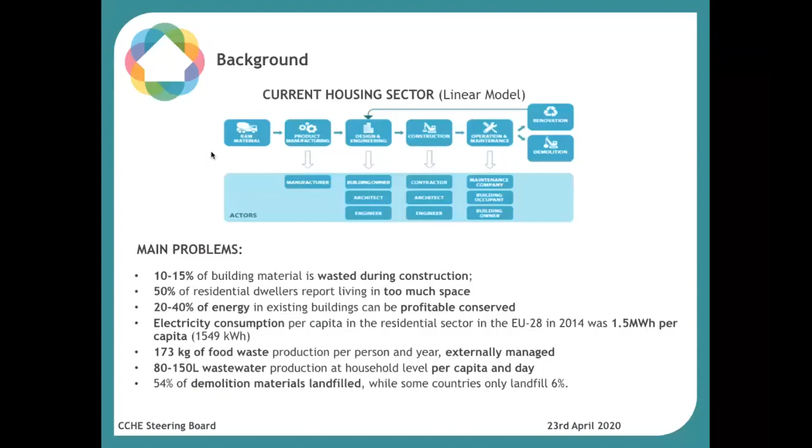generates problems: from 10 to 15% of building materials is wasted during construction. Around 50% of residential dwellers report living in too much space. From 20 to 40% of energy in existing buildings can be profitably conserved. There is a large amount of energy consumption per capita in the residential sector in Europe, around 173 kilograms of food waste production per person per year which is externally managed, from 80 to 150 liters of wastewater production at household level per capita per day, and around 54% of demolition materials go to landfill, while some countries only landfill 6%.

So the main goal and scope of the HOUSEFUL Project is that the project develops an integrated system of services composed of different solutions co-created by stakeholders in the current housing value chain. The HOUSEFUL service will aim at the circular management and efficient use of water, waste, energy, and material, which are the vectors in which we develop the selected solutions. Finally, those solutions will be integrated into a software as a service, enabling the replication of proposed circular solutions offered to stakeholders as a circular economy business opportunity.

So to demonstrate that those solutions developed in the HOUSEFUL project can be profitable and work in a real scenario, we evaluate and integrate those solutions in 4 demo buildings. Those are the front runner buildings: 2 of them, Demo 1 and Demo 2 in Spain, and Demo 3 and Demo 4 in Austria. All of this is with external advice and collaboration with the CCHE board.

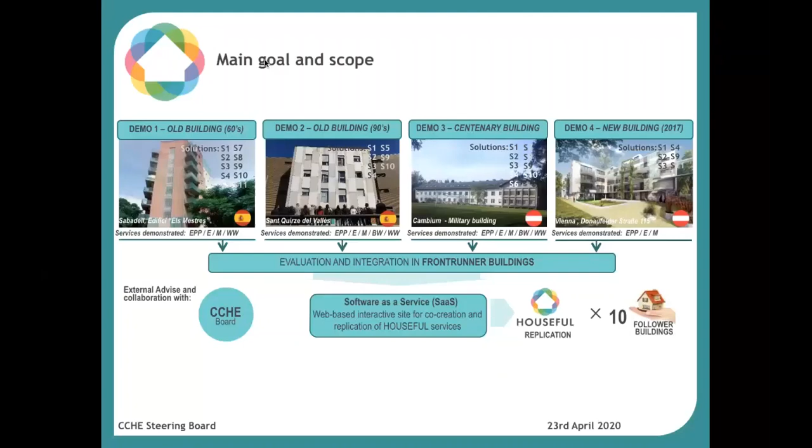So within this project, we have 5 main challenges. The first one is to redesign the new business model in order to break the linear procedures into a circular economy that helps us reduce all these impacts that we've seen.

The second challenge is the need for a robust, standardized, reliable, and day-to-day market usage methodology to quantify the degree of circularity. This is the key point we are going to see here in this webinar.

Challenge 3 is to guarantee the environmental, economic, and social feasibility of the circular existing and innovative solutions in order to co-create the service by applying the life cycle thinking approach.

Challenge 4 is overcoming the cultural and social barriers, also very important, for the effective co-creation and acceptance of the new circular economy business opportunities.

And finally, challenge 5 is providing policy recommendations, guidelines, and tools able to enable the current framework conditions in the housing sector.

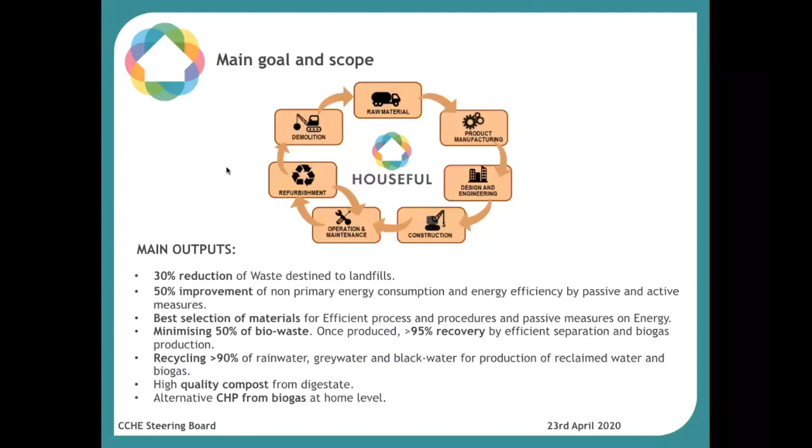Recycling more than 90% of rainwater, grey water, and black water for production of reclaimed water and biogas. High quality compost from digestate, and an alternative CHP from biogas at home level.

And that's all. It's a quick introduction to the project, but you can also send me an email or ask me for more information if you are interested about it.

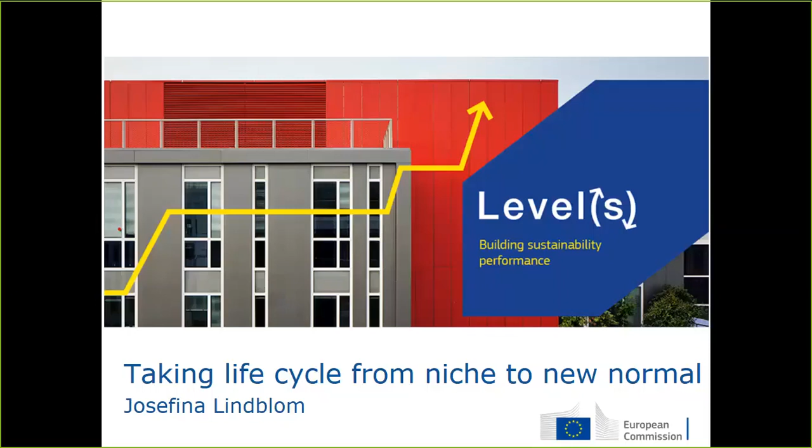So what areas are we covering with Level(s)? First of all, we are covering 3 areas which are all linked to resource use and hence environmental impact: whole life carbon, so energy, water, and materials. And there we have waste included as well, of course.

We also have 3 areas more linked to the quality and value of the building: health and comfort, resilience to climate change, and life cycle costing. So in those 6 areas, we have indicators.

So as I said, we have indicators in carbon, material, water. Then we have health and comfort, where we look at indoor air quality and thermal comfort range. And then we have cost and value. Macro objective 5 is resilience to climate change, where we look at time out of thermal comfort range, just as under macro objective 4, but here instead of today we do it for future climate scenarios, 2030 and 2050. The last one is on life cycle costing and value creation of the building.

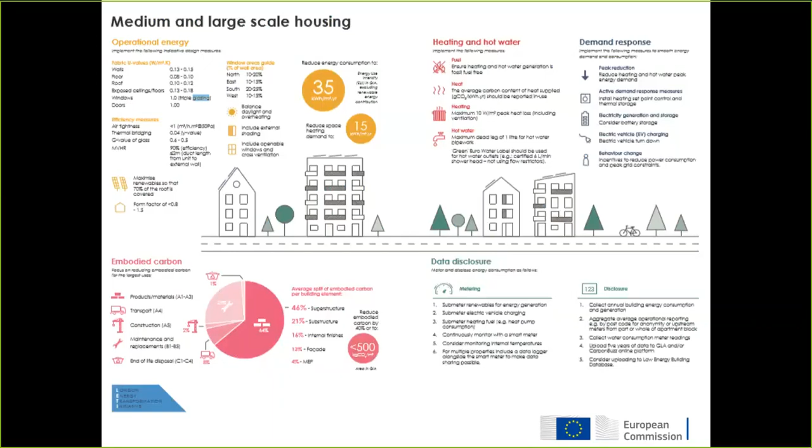So Level(s), what is it going to be used for? We see it as it can link circular economy and a carbon neutral Europe through lots of different kinds of initiatives at the EU level, whether it's sustainable finance work or green public procurement or anything else. We want to support member states to integrate life cycle thinking into building codes and their own procurement. We believe that if we use the same kind of methodology, the same language, even if we use different initiatives, then we can improve comparable life cycle data, enabling learning and benchmarking.

We want, as I said in the beginning, to support normal building projects to consider life cycle in a slightly easier way than what is available to the market. And also then certification schemes assuring their work reflects European policy by aligning themselves with Level(s). And we see how many of them are doing this already.

Also for investors, I wanted to finish off with what we have understood in the development of Level(s), because investors have been part of that development as well. They see many of the indicators as really useful for them, whether it is on health and comfort, buildings being adaptable, flexible, looking at the service life, the obvious ones with energy and water consumption, but also life cycle costing, and interestingly enough, the embodied carbon piece, the indicator that I focused on here during my 10 minutes, for future legislation.

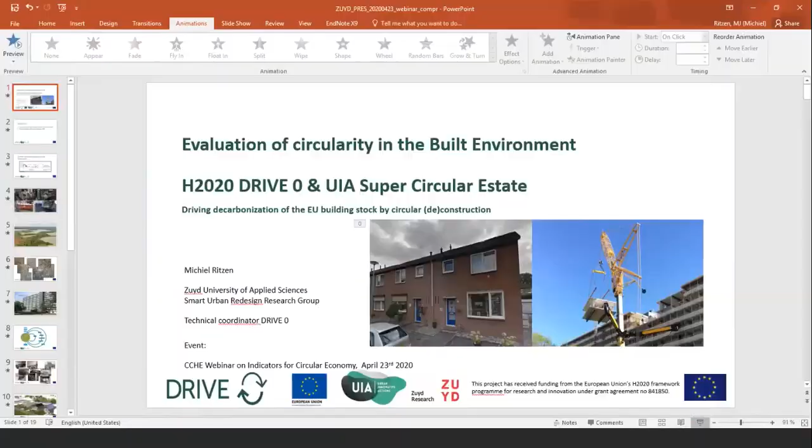Yes, thank you, and welcome everyone to my presentation. I hope you see it. Yes, correct, that's good. So why do we need it, and what are we doing in our research group actually in this field? That's what I'm going to present in the next 10 minutes. It's a full presentation, 19 slides, so I will go very briefly over them. In two of our research projects, we're addressing this issue, evaluation of circularity in the built environment. The projects are Drive Zero and the Super Circular Estate.

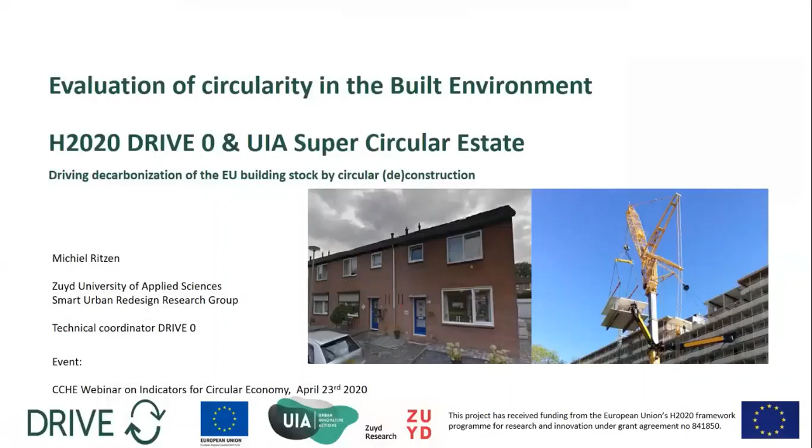Just briefly the background, and I think the previous speaker already explained very nicely the challenges we have in the built environment, the huge environmental impacts, and that's of course why we are focusing on decarbonization of the built environment.

But this built environment decarbonization is mainly looked at from an operational energy perspective. That is only part of the story.

And of course, now we have the other ambition within the Netherlands and the European Union to work towards a circular economy. By 2050, at least in the Netherlands, we want to be completely, fully circular. And by 2030, we already want to be circular by 50%.

That has huge implications for the built environment, because the current demolition practice in the Netherlands, and these numbers are comparable worldwide, is that we hardly reuse or recycle any material. We say that we recycle about 95%, but most of this is being downcycled, and only 3% of demolition materials go back into building construction.

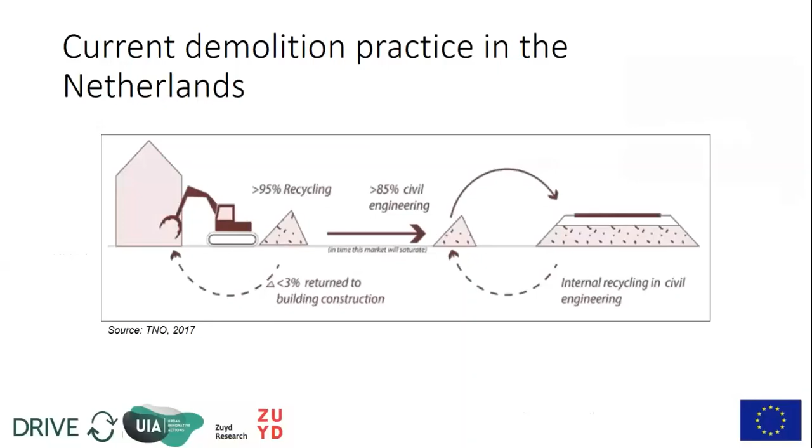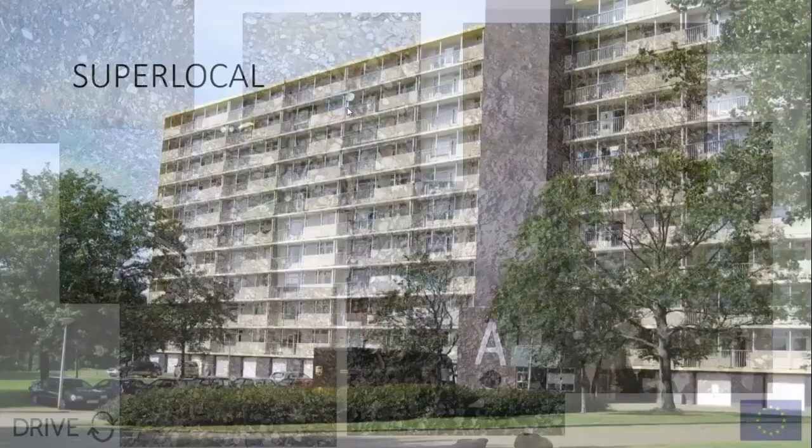So in our first project that I want to present, it's called the Superlocal project. We had 4 of these high-rise buildings, and they were obsolete, they needed to be demolished. We said, let's not demolish them traditionally, but let's apply this 9R model and think from a material perspective.

So what we did is we made a full inventory of all these apartment buildings. We have more than 10,000 QR codes. We labeled everything. We know exactly what was in these apartment buildings.

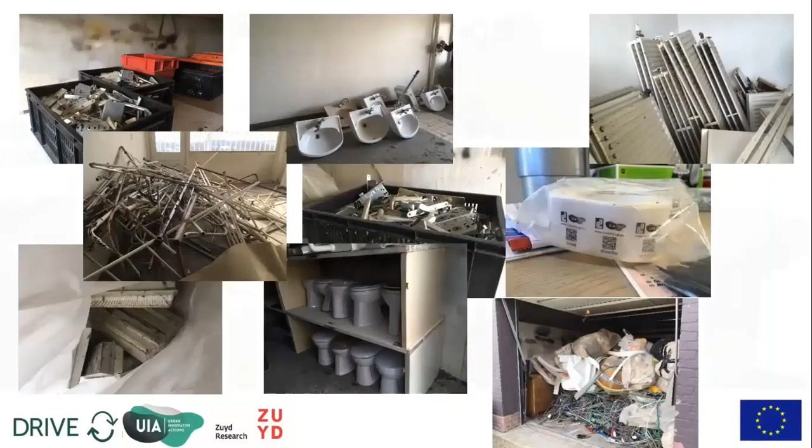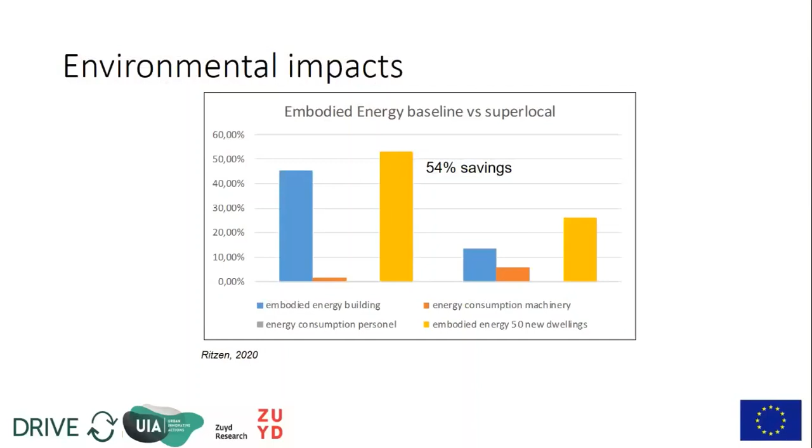We started making the first calculations, and we said, okay, if you're only looking at embodied energy on the demolition potential from this apartment building, we can have a 54% saving.

So that is what we challenged ourselves on in the Drive Zero project. How can we realize renovation solutions based on this thought of reusing materials from demolition.

We said focus on reusing and recycling. I hope the microphone is better now.

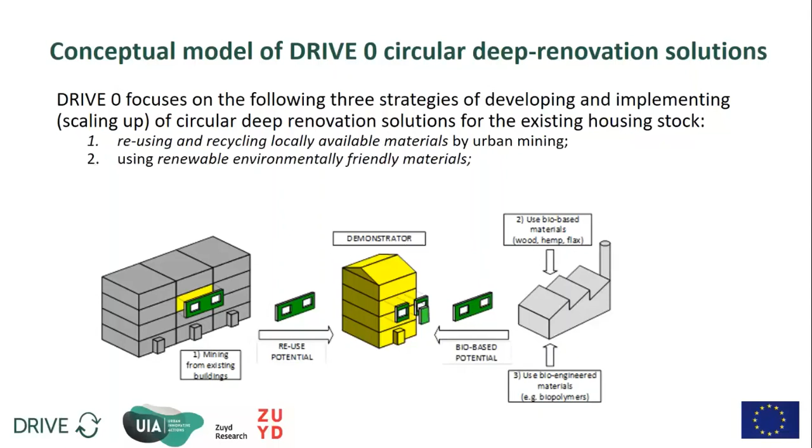Now, we said we're going to reuse and recycle locally available materials by urban mining - it's the most important step. Then we're going to use renewable, environmentally friendly materials and bio-based engineered materials, so that the life cycle energy is lower compared to traditional retrofit solutions.

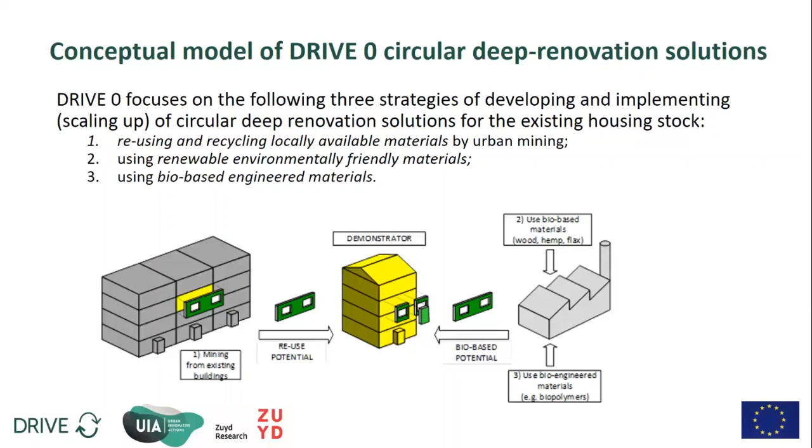And what is then a circular deep retrofit or circular deep renovation? The first thing is you have to have a full understanding of the definition. We said you cannot speak about a circular solution if it's still based on fossil fuels, so it has to be based on 100% life cycle renewable energy.

Meaning you provide enough renewable energy for the operational energy as well as for the embodied energy. Moreover, all your materials should be part of infinite technical or biological cycles.

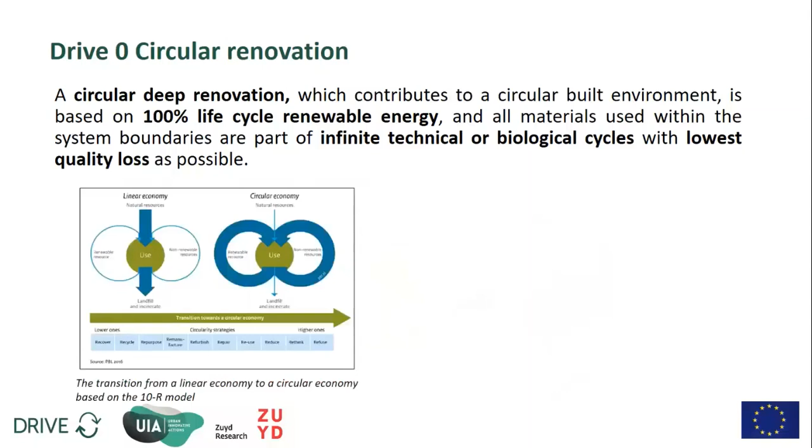And how are you going to address that, in the 7 demonstrators that we have in the project, and how are you going to calculate it? That's what we did last month - we finalized our first report, focusing on these environmental impact indicators that were very clearly mentioned by the previous speakers, embodied carbon indicators.

But we now need to make the next step to combine environmental indicators with criteria. What we did is 4 main criteria.

We're losing Michiel, I think - again. Hello? I'm back? Yes, just the audio sometimes is not so clear, but now it seems to be better.

So we combined the environmental impact indicators, as mentioned by the previous speakers, with design for disassembly criteria.

What I wanted to mention in this report is that the embodied energy ranges between 1.5 and 7.6 gigajoules per square meter of the benchmark. In the next step of this project we have to combine this with the operational energy and work towards a complete lowering of the life cycle energy.

Then we combined those numbers with the building circularity indicator that already exists, developed by the MacArthur Foundation and ALBA Concepts, and we investigated the differences. If you look at it from a mass perspective, that's mainly being addressed at the moment in a number of projects, but mass only is part of the whole story. We should be calculating embodied energy, operational energy, and embodied and life cycle carbon or CO2 levels as well.

What we see in the projects is that there is a recoverable material potential between 20 and 85%. That means that if we rethink our projects correctly, we can achieve a significant lowering of embodied energy.

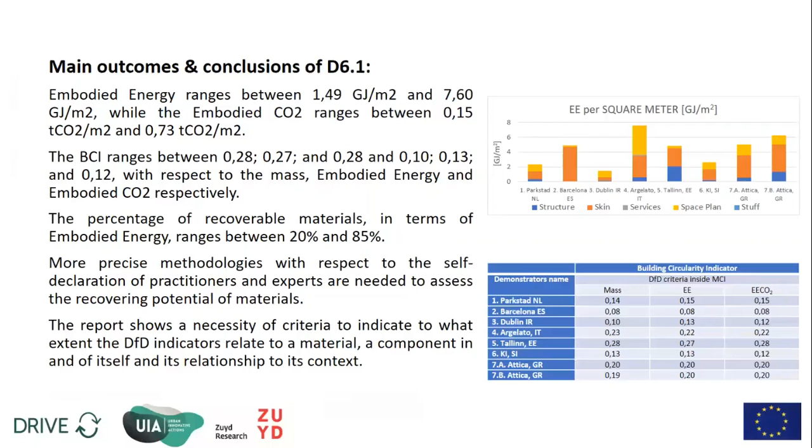Looking forward, we're now in the phase of the next task in our project. We are collecting a number of monitoring technologies on circularity, and here your input is welcome. If you have technologies, we are really looking forward to hearing about them.

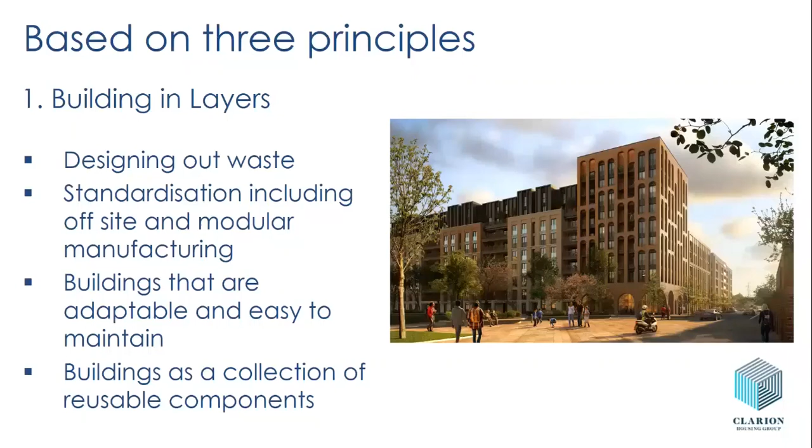So how do we design them to allow that to happen cleanly and quickly and without too much impact on the structure? This last one is a conversation we're having with quite a lot of our design teams at the moment, wanting them to think about buildings as a series of components rather than a single structure on its own. So how do we design it in such a way that it could be taken apart later, those materials reused, perhaps in other structures or in completely different ways? So just before they start to design anything, how do we anticipate the end of life for the building itself?

The second principle is around social value. Again, this is a sort of stretching of what maybe most people think of as circular economy, to think about how we engage with the communities we work with and other stakeholders. How do we promote a sharing economy, and look at influencing behavior around recycling and waste within the home itself? So it's a very important part of our whole approach.

And then this third one, perhaps is more expected, is around waste and the waste hierarchy. Demolition for maximum recovery value. Now, if you remember that image we saw a little earlier of those homes that are now on site and being built out, this is what they are replacing. This is next door to that site. So with this tower block, what we do is a pre-demolition audit - what are the materials in here that can be reused, recycled or upcycled or used in the new buildings - and then we allow for additional time in the demolition program for the whole building to be soft stripped and reused then as much as possible as we go through the whole process.

Then we really look at, obviously, supply chain integration. These are large schemes over a number of years, so there's potential to do a great deal of work around supply chain integration to maximize on our circular economy outputs. And then the last point here is deconstruction plans. So now when I get a pitch from an architect to design a building for me, I'm also asking them: how are we going to take that building apart?

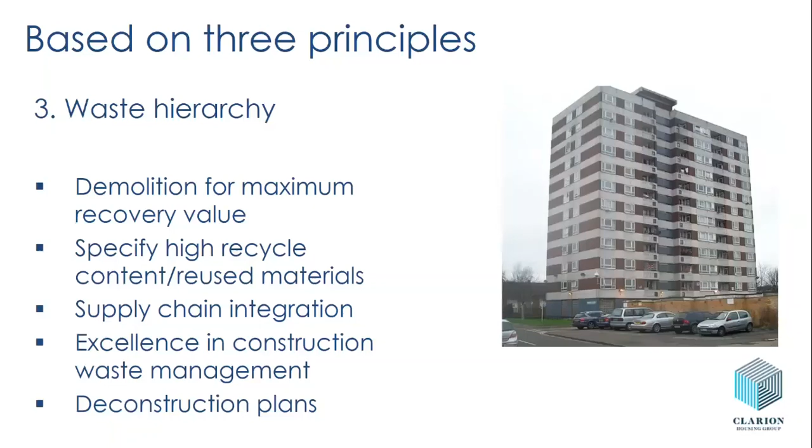Show me how you've designed it in such a way that that building can come down in 50, 60, 80, 90 years from now. So in terms of practical delivery, these are the processes that we're thinking about.

End of life for existing buildings, like that tower block we just looked at. Looking at what products and components we're going to be using. How can they be reused? How can they be upcycled? Where do we get social economy benefits through the construction process itself?

Then the most important bit, and the bit that gets overlooked, really, is the use stage. These buildings in these neighbourhoods are going to be places to live, places that need to be maintained and adapted and upgraded for decades to come. So what are the decisions we make early on that allow us to deliver and maintain and run these places with circular economy principles to the fore?

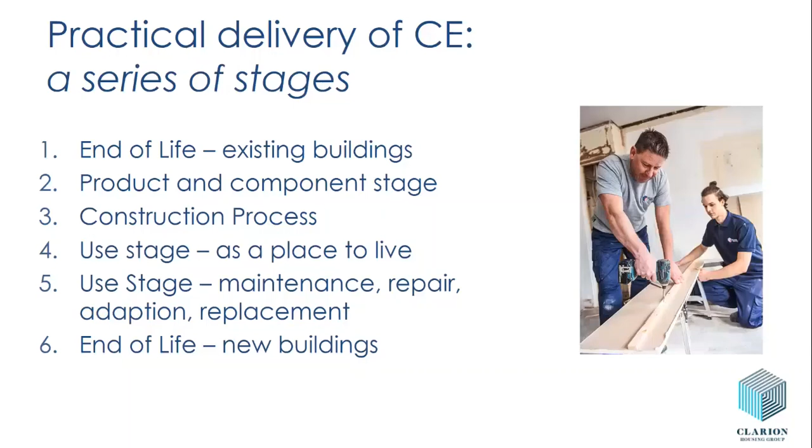And then we come full circle again to end of life for these buildings. Are they refurbished? Are they replaced? How do we design in such a way to accommodate that?

As touched on earlier, we're a very large organization, so we have particular strengths. We're buying a lot, we're commissioning a lot, we're replacing many components through the lifetime of these buildings. So in all our major procurements now, we ask questions about circular economy. They're scored, they're part of what determines who wins this work and who doesn't. Effectively, we're trying to shape the market to think beyond traditional responses to sustainability, to be thinking much more along the lines of circularity. So we're using our spending power to allow us to do that.

One of the important things we try to emphasize here is this is much more than just about sustainability. I think we're all used to seeing sustainability strategies as part of regeneration programs, housing, built environment. This involves a different kind of thinking. We're right at the start of that. We're using our procurement strength to help drive that process along.

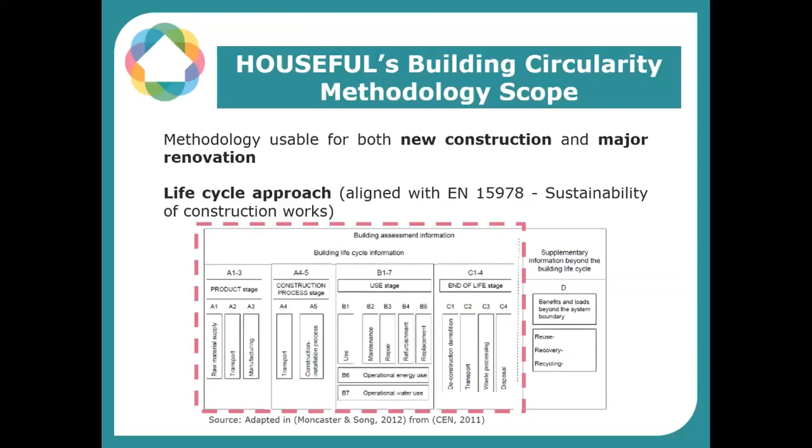So how are we approaching this measurement of circular economy? First of all, we propose to measure the energy consumption and the rate of, let's say, 'circular energy'—and I put that in quotes because circular energy is not something clearly defined—but we aim to measure how much of the overall embodied energy within a building's life cycle comes from renewable sources. Not only renewable sources: for example, if we are refurbishing a building and increasing the insulation of the building's skin, then we have reduced energy consumption. So energy savings shall also be accounted as circular energy from our perspective.

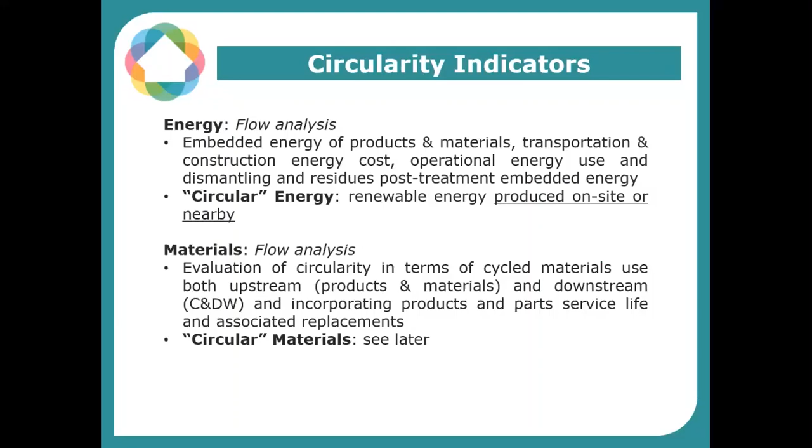Also, we are performing a similar analysis from a water perspective, evaluating the rate of water that comes from cycled sources. Water is a circular resource by its nature, but what we understand as circular water here is the water that comes from cycled sources recovered, for example grey water or black water, rainwater, and so on.

These are three approaches more or less similar for these three pillars to the suggested approach from the Ellen MacArthur Foundation, which is a flow analysis perspective. And now we are moving to other aspects which cannot be measured in that way, and we want to also valorize somehow the social added value of our building construction.

We understand that providing health and comfort, in Level(s) terminology, is something that provides social added value. You are providing comfort to people, healthier people, and this is not only related to energy consumption, but also relates more to health aspects and the health of the end occupants of the buildings.

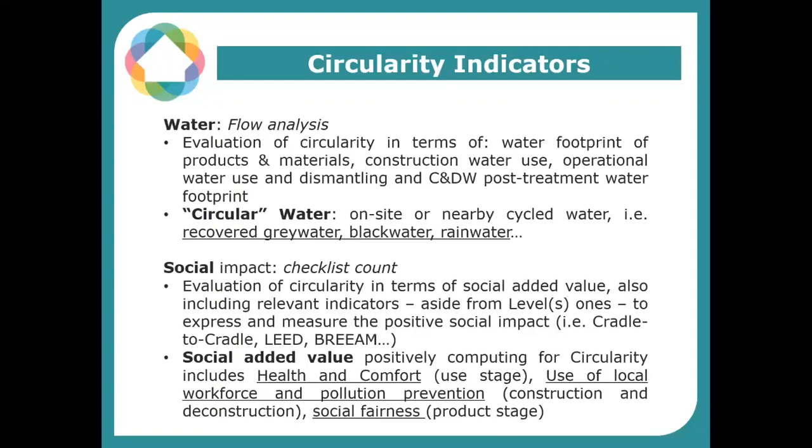But also we want to valorize or value the companies that use local workforces in construction of the building, that prevents pollution during construction and deconstruction activities, or big maintenances or refurbishments, and so on. Also social fairness measures, producing or manufacturing products for building construction or renovation.

And the last two aspects that we are including here are LCA and LCC indicators, but not in general terms, rather in terms of how you are reducing the environmental impact with respect to the existing park of buildings, or with a similar building that is not including circular economy measures.

Also in terms of economic value, and it's important to have this from our perspective. It's important to have these two indicators in reduction terms, because in this way we are going to have percentage indicators for all the 6 pillars that I just explained.

As I said, this is a work in progress. We still don't have the exact values of these indicators for our pilots, for our demo site buildings, but we are going to have them eventually in a couple of months, when we start implementing the solutions.

But I wanted to show you how we are proposing to visualize or plot the results of our methodological assessment, or circularity assessment, sorry. And as I said, these are not real values, but could be similar to real values, because some of them come from baseline assessments.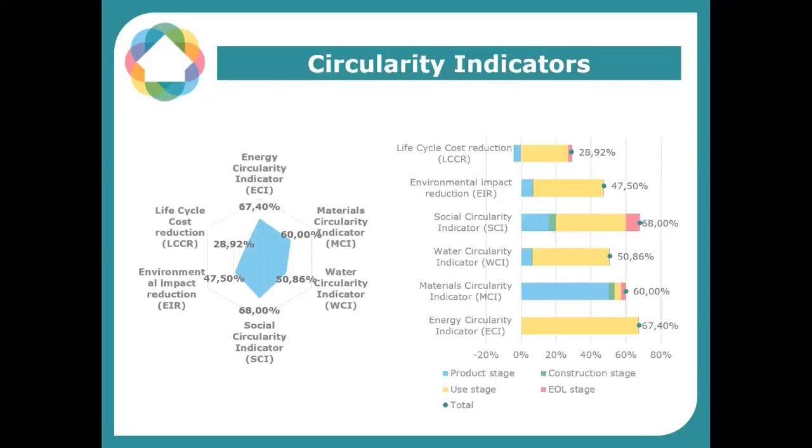But... your time is over, so okay, I'm going to just finish in a minute. This is my last slide.

Well, but what we also saw is that these different indicators that we are showing are not comparable between them, because you can save energy while increasing the use of water, and so on.

So we want to introduce here the importance of the location of the building that we are assessing, because if you are doing a building circularity assessment in, let's say, Southern Europe or Southern Spain, for instance, the savings of water or the reusing of water is going to be more important than in Northern Europe, where there is plenty of water resources.

So in this sense, we want to introduce some Eurostat indicators, all of them Eurostat indicators, to somehow weigh the different importance of the different pillars in different locations. Through the energy dependency rate and the share of renewable energy in gross energy consumption, we can assess how stressed a location or country is in terms of energy dependency and consumption of fossil fuels for energy production, and so on.

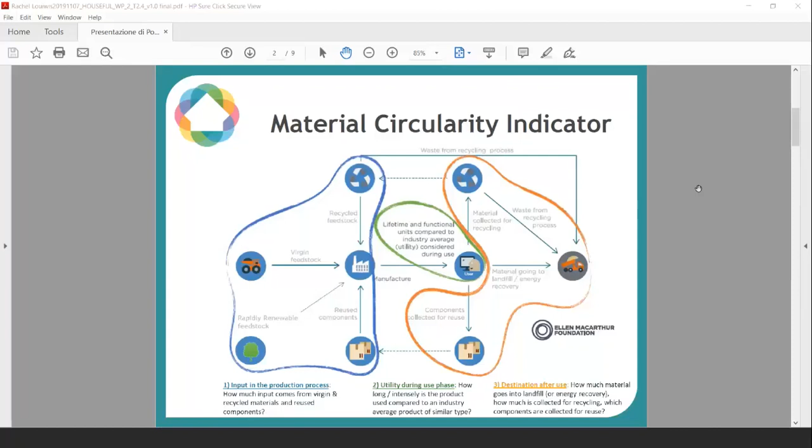Then in the HOUSEFUL project, we have 4 demo sites for which we create a material passport. We team up with one of the partners called ITEC, and they work with the demo teams to generate all the needed information, and they generate a BIM model, which is then uploaded in Madaster. And then once that's uploaded, we work together with ITEC to enrich the data so we get the best results.

Doing so has a couple of things why we think it's important. First of all, the first step is giving materials an identity for everybody to know what material is located where in the building. And once you do so, there's the opportunity to determine, for example, the embedded carbon, the toxicity. It gives you a lot of advantages.

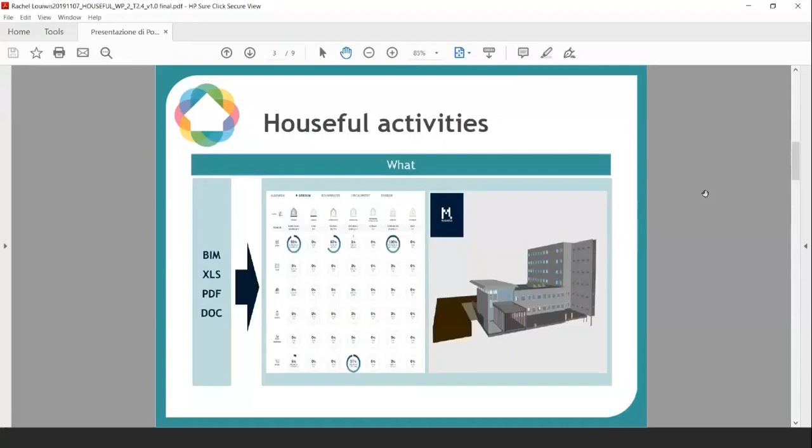But knowing the materials, we also want to give the materials a financial value, because that will be an important incentive for building owners or anybody within the building life cycle to increase circularity. And as you also can see in the picture, you can also use it for changing the valuation to the value of the material instead of to 0. So that's our thought on why giving the materials a financial value is very important.

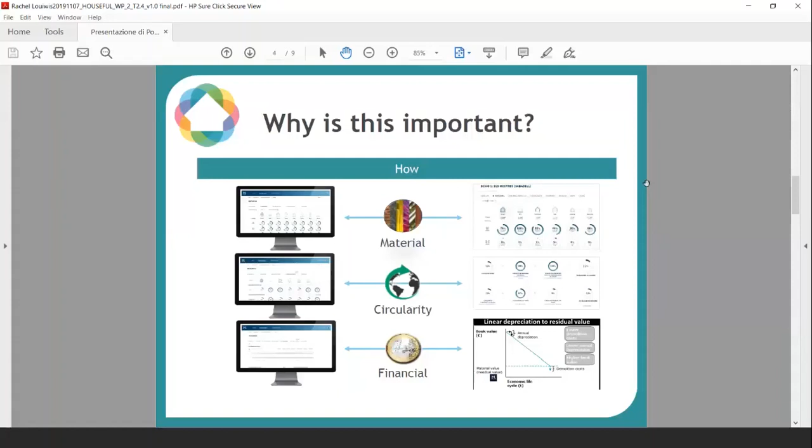And then the last fact, as we mentioned, why we think it's that important, but it gives reason or opportunities over the building life cycle of why we need to start registering materials used and increasing circularity. That was it.